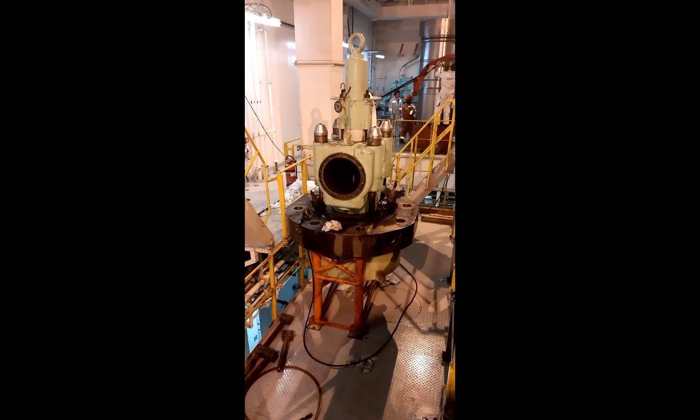Good day. We will talk about ship steam service system.

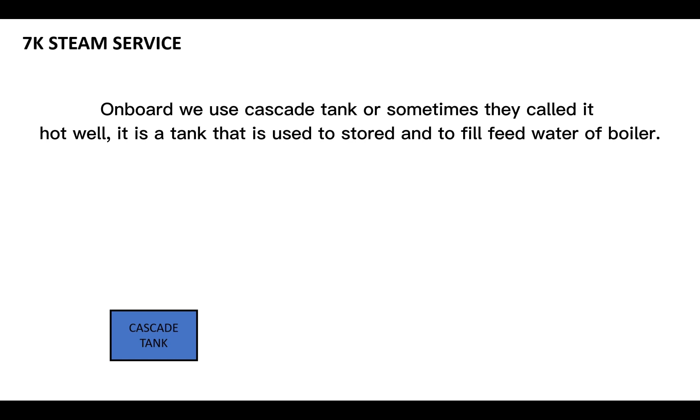We know that for us to produce steam, we always need a liquid or water to change its state to gas. Where does the water come from? On board we use a cascade tank, or sometimes they call it hot well. It is a tank that is used to store and to fill feed water of the boiler. From the cascade tank, a pump moves the feed water to the boiler. It is called boiler feed water pump.

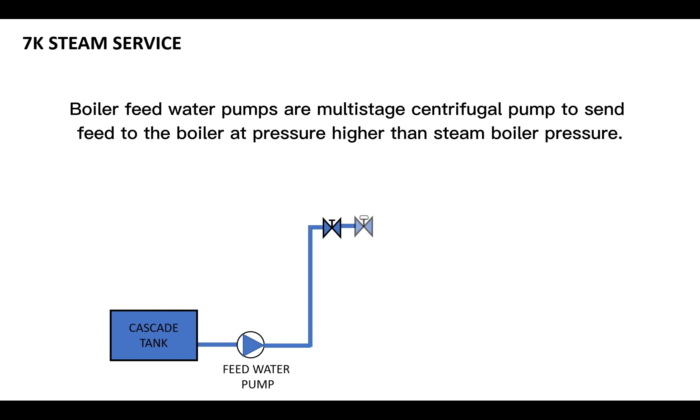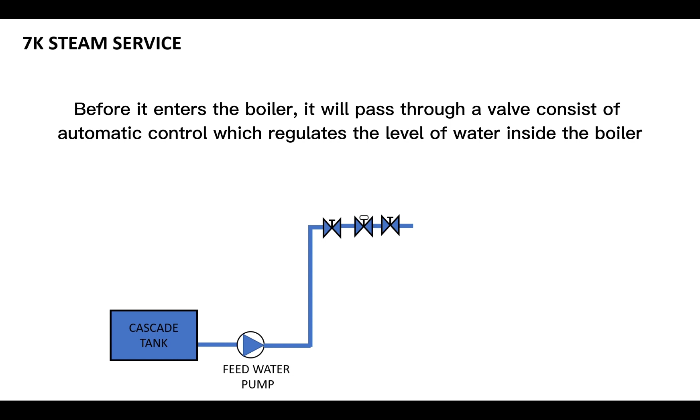Boiler feed water pumps are multi-stage centrifugal pumps to send feed to the boiler at pressure higher than steam boiler pressure. Before it enters the boiler, it will pass through a valve consisting of automatic control which regulates the level of water inside the boiler, meaning it will close or open depending on the demand needed by the boiler.

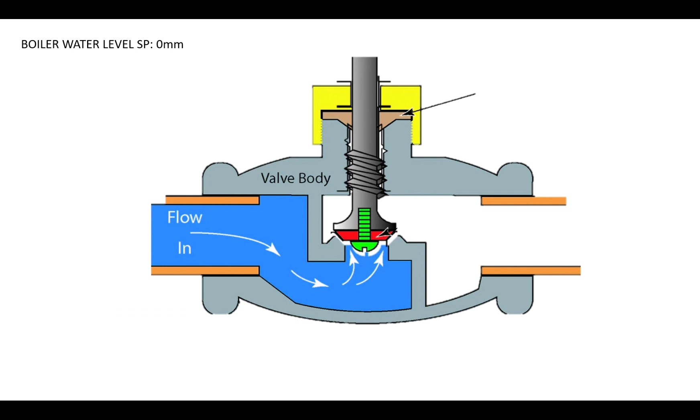For example, boiler water level is set to 0 mm. If your boiler level decreases below 0, the feed water auto valve will open until it reaches 0 and close again. If boiler water increases above 0, the automatic valve will remain closed.

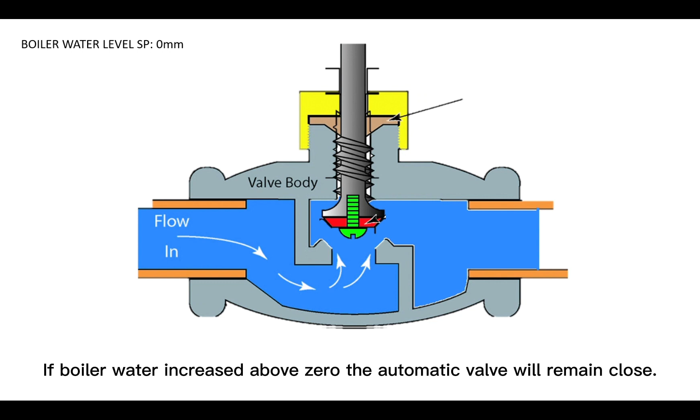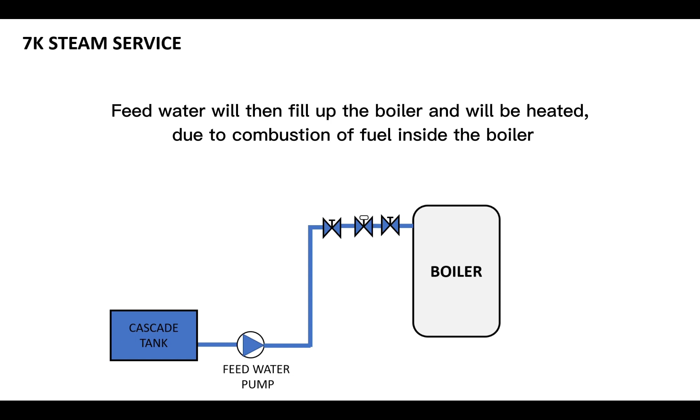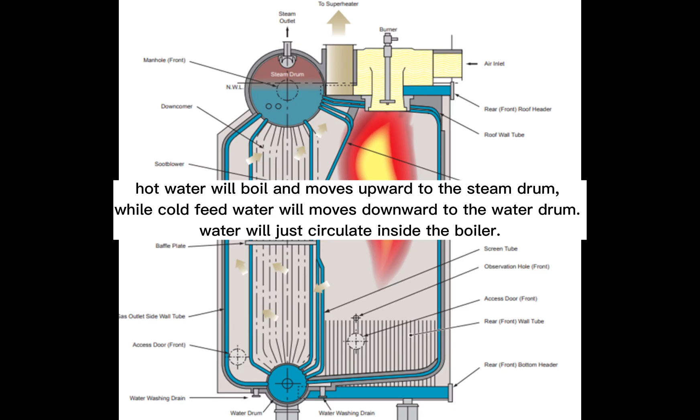The boiler is composed of a steam and water drum. Feed water will then fill up the boiler and will be heated due to combustion of fuel inside the boiler. Heat of combustion will be transferred to the feed water by the tubes and eventually boil the water. Hot water will boil and move upward to the steam drum, while cold feed water will move downward to the water drum. Water will just circulate inside the boiler.

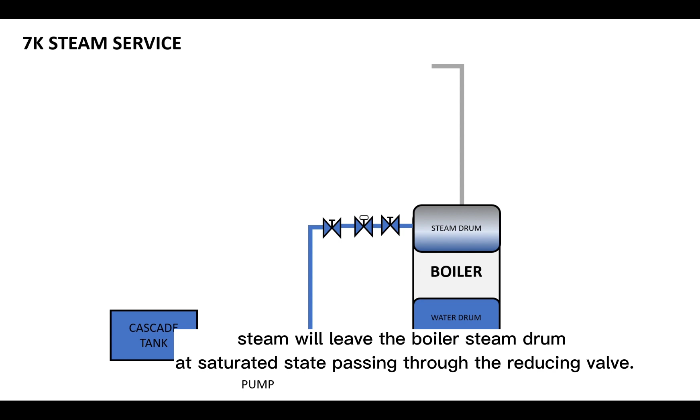Steam will leave the boiler steam drum at saturated state passing through the reducing valve. The reducing valve will regulate the pressure coming to the system service. 7 bars of steam pressure will be sent to the system. Steam is used to heat different machinery or equipment: HFO bunker tanks, water calorifier, cargo tanks, waste oil tanks, purifier heaters, steam tracing, boiler atomizing steam.

After passing the service system machinery, feed water will come back to the cascade tank as liquid. A condenser will be used to cool down high temperature condensate water.

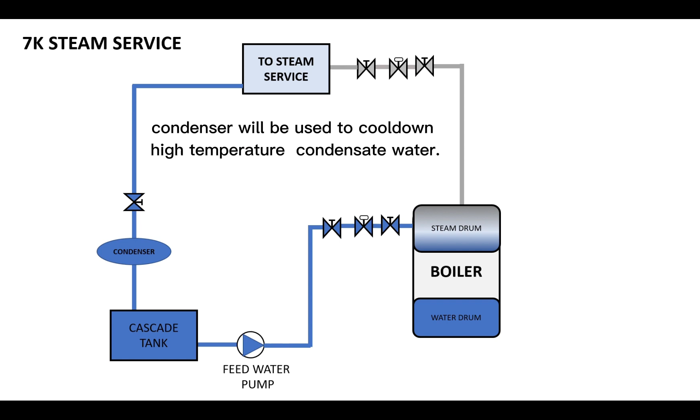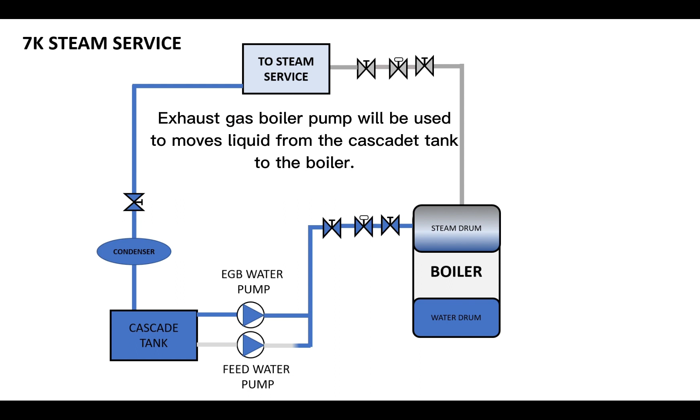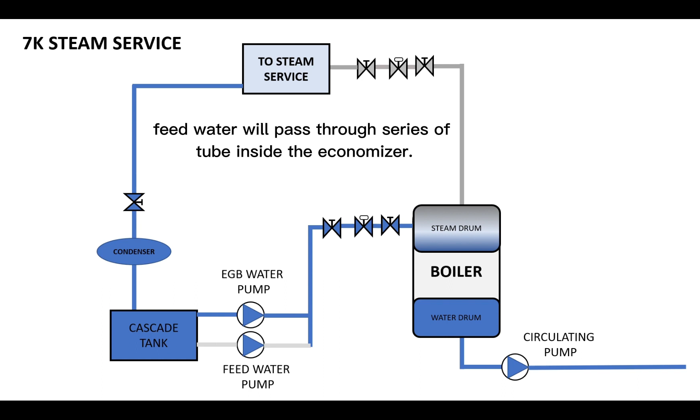At sea, the boiler can be stopped and the economizer boiler can be used. The exhaust gas boiler pump will be used to move liquid from the cascade tank to the boiler. Feed water from the drum will be transported to the exhaust gas boiler by the use of the EGB circulating pump. Feed water will pass through a series of tubes inside the economizer. Heat of exhaust gas will be transferred to the feed water through the tubes.

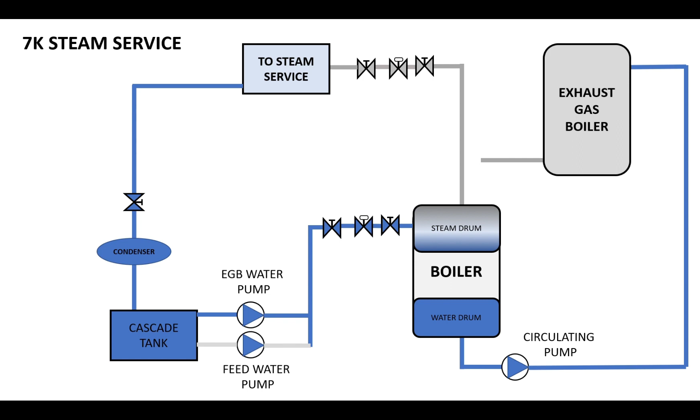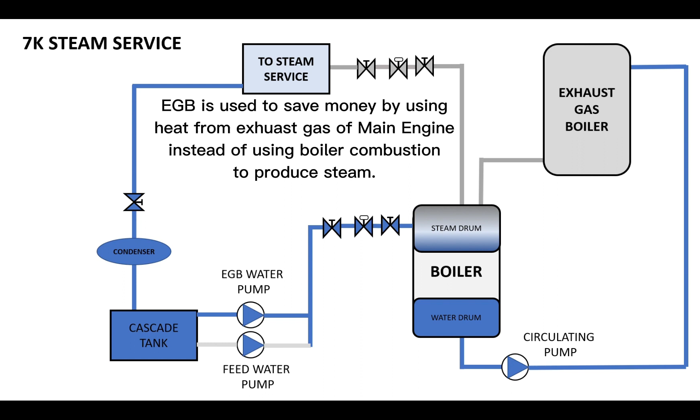Steam produced by the EGB will be sent to the boiler. Steam will then be sent to the system. The EGB is used to save money by using heat from exhaust gas of the main engine instead of using boiler combustion to produce steam.